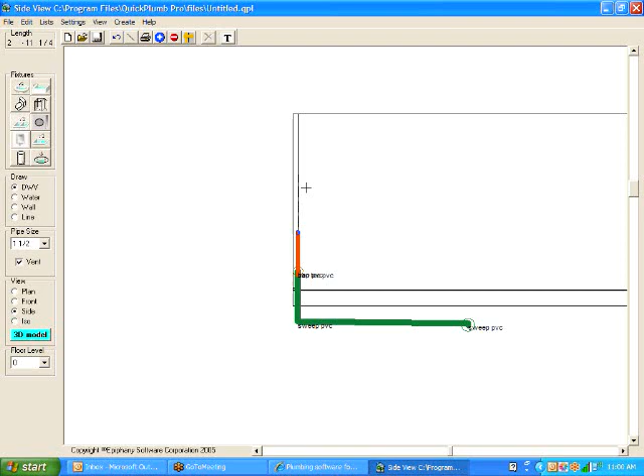It's not going to interfere. Now I can work on these pipes without interference and without confusion.

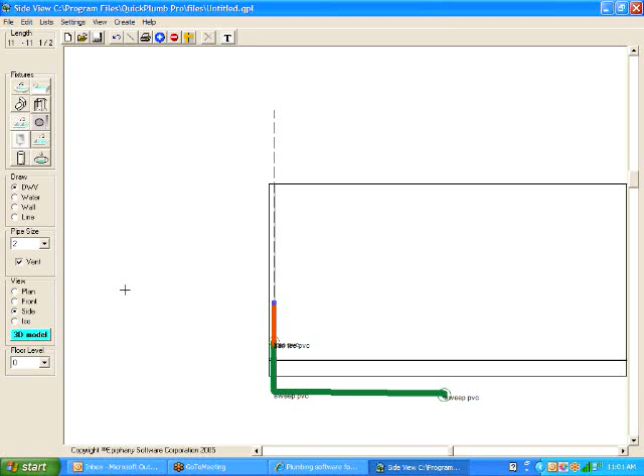So now I might decide to go ahead and bring that washer vent out and through the roof. By doing it this way, you could draw or have it captured where you could draw a fixture at a time if needed. That's right, and you can zoom into that fixture and edit it and add pipes without the rest of the drawing getting in the way.

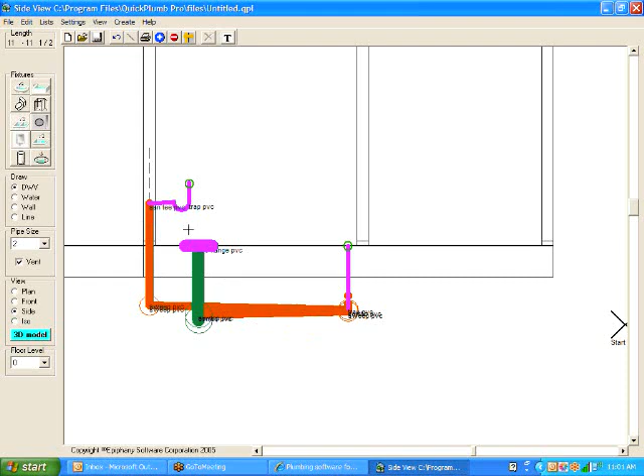Same is true with this bathroom down here. In side view, I've got, that's not so bad, but I could zoom into one part of it or one fixture, go to side view, zoom out a little bit, and now I can work with that by itself without anything else getting in the way.

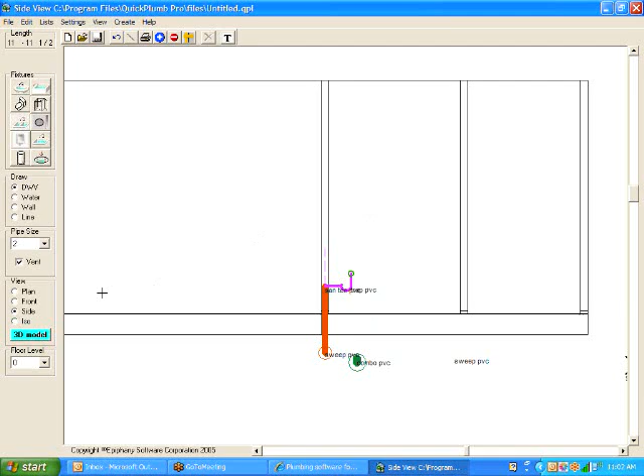Mark, I'm looking at the side view that you have shown right there. Those pieces that are somewhat black and white, are those 2x4s? Oh, yes. This is the 2x4 framework. These are the walls that we drew in the plan view. They're kind of an aqua color, but in the side view, that represents the framing of those walls. You can actually see your plumbing wall as you're plumbing it up inside that wall, or of course, if your pipes are outside the wall, then you can tell right off that your plumbing's not going to work because, of course, you're outside the wall.

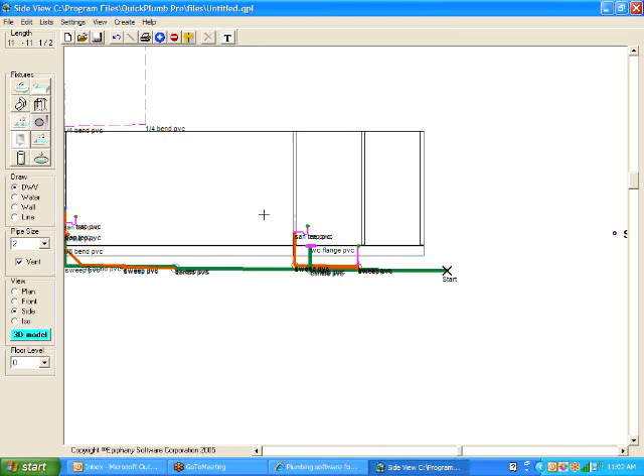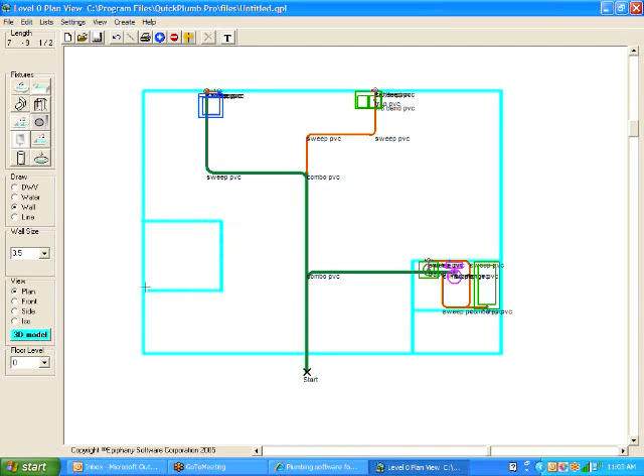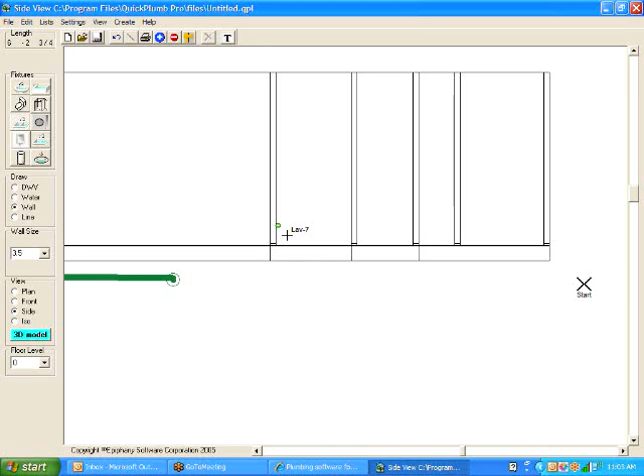That's exactly right. I'll show you a little example of where you might have a problem, and the side view will help you. Well, let me cancel that. I meant to draw a wall. I'm going to draw a wall here, and let's say this is another little bathroom, and I'm going to put a lavatory in there, get it turned the proper angle. I'm going to leave it outside the wall. I might not catch that when I first place it, but when I go into side view and I see this lavatory here, I can see that it's outside the wall now. So now to adjust it, I'll just click on that circle and move it on into the wall.

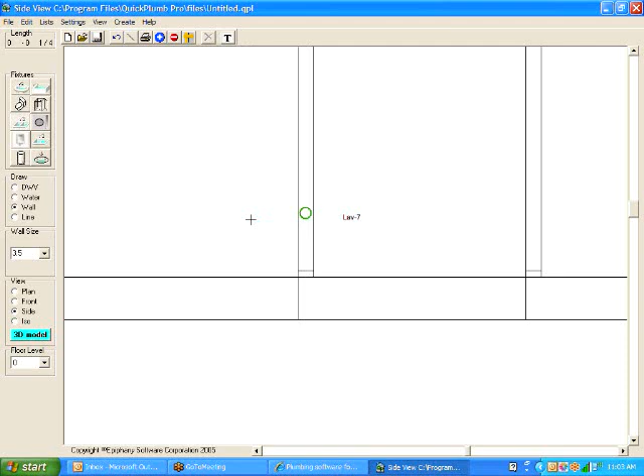Or I'll just click on the circle and I'll drag it with the mouse. Either way. Or I could click the circle and I can move it with the keys, the arrow keys on the keyboard, if I want to be a little more precise. So either way is fine. And once I see it's in the wall properly, now it looks like it's pretty much in the wall. Now I can go ahead and connect that by going back to DWV, select 2-inch pipe size, and I'll click on the drain and drag it over here, and there it is.

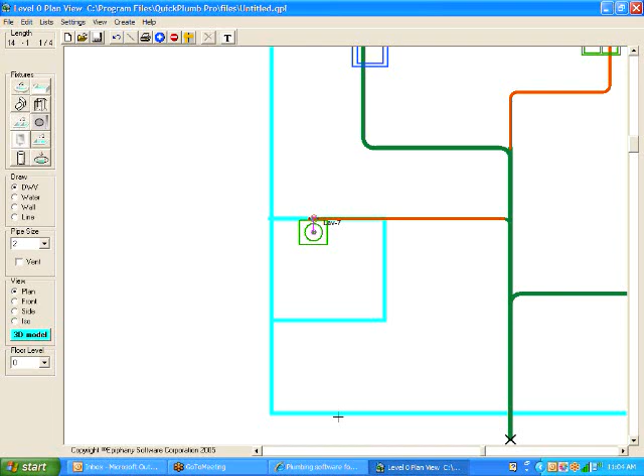Mark, if I can point out, can you go back to side view again? Sure. One thing I don't know if I'm sure, they're just trying to keep up a mile a minute and doing some things on their screen, but over on length, I think that's a real important feature that you may want to mention, because I'm noticing that every time you make a change, it's changing the length and keeping up with that. Oh, the length box, absolutely. Whatever pipe you have highlighted, you can see its length up here in the length box. And if you need the cut length, that's also represented over here in this box.

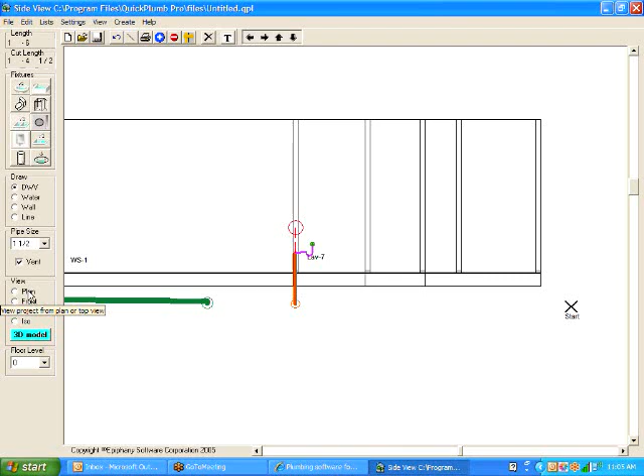So it's actually figuring, on this project we're doing, Schedule 40 PVC? Yes. So on this particular project, not only does it give the total length, but it actually gives the cut length of that actual cut piece on the chop saws at the time it goes for the install. Is that correct? That's correct. In other words, it's compensating for the size of these fittings. Here's a combo that sweeps way out here, so your cut length is almost always going to be smaller than the actual distance from center to center. The length will be from here to here. The cut length compensates for the various fittings.

So that's a nice feature where you don't have to go off to your takeoff books. This literally is a tool in itself, a time saver so you don't have to go out there and figure that math portion. Right, and if you highlight a pipe that's already been drawn, it indicates the length as well. As you can see here, it'll give you the cut length up here of any pipe that's highlighted.

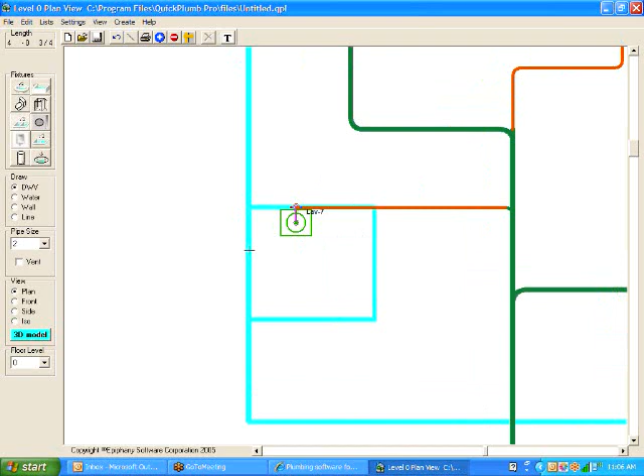So that's a good point. Let's see now, where was I? Okay, well, let's go ahead and, excuse me, we can finish out these vents.

Our code requires at least one 2-inch vent through the roof on every building. Actually, it reads no smaller than half the size of the building drain, or no smaller than 2 inches in any case.

So I can connect these vents together. Let's say I want to connect this lavatory vent over to that washer vent. I can come up into the ceiling space, click on the end of that vent, drag it over to the washer vent, release it, and it's going to make my connections for me.

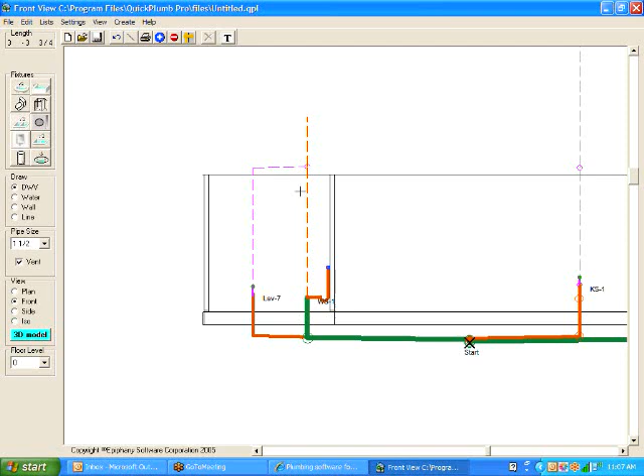We'll go to isometric view, and I'll show you what I mean. This is the pipe that I actually drew, and it brought an additional pipe back over and into the washer vent. So it's drawn in 3 dimensions while you're only working in 2 dimensions.

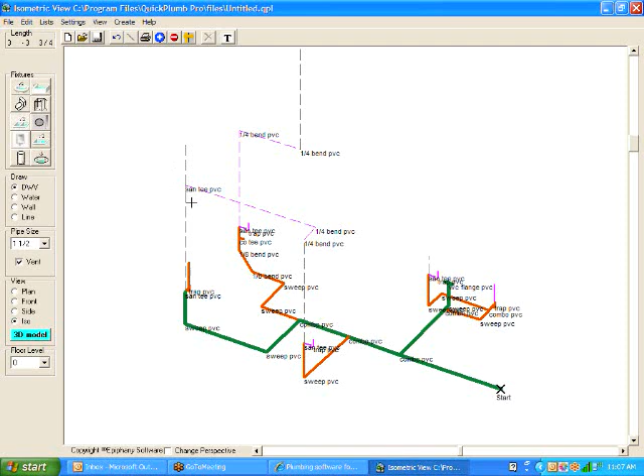Let's view fitting labels. See, it gave me my quarter bends that I needed and my sanitary tee over here. So anyway, you can edit your vents just like you do the rest of it.

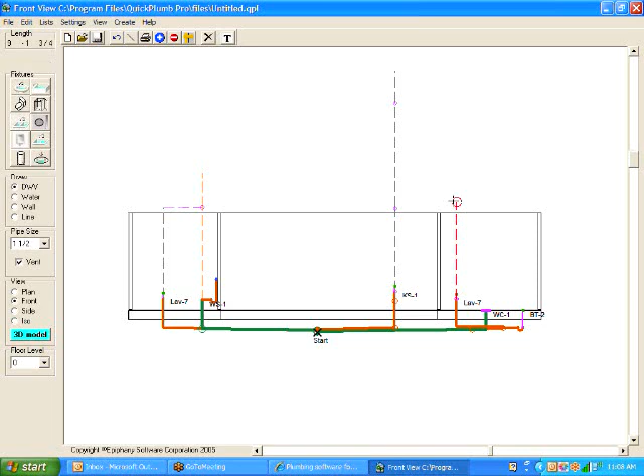Now the only thing left is I've got a vent over here. If I don't want to use an air admittance valve over here, I'll go to front view, and I can bring this vent out individually, or I can tie it in with this other vent stack and use the same vent pipe. So that's a complete plumbing system.

That's in terms of DWV. Now we haven't added any water distribution yet, but I want to demonstrate what you can derive from this drawing. We've already talked about the pipe cut list, which I'll do now.

I'll click on Create Pipe Cut List DWV. Let me see if they can follow along on this one, because this is a really neat feature. So for whatever you've drawn so far, guys, you're going to get maybe a few lines, something that's on the screen in front of you.

At this point, go ahead and follow along with this Create feature. That way you can go ahead and pull together what he's fixing to show you as far as what this tab can do. Whatever you created so far, let's see what this tab can do.

Okay, I'll click Create, and we want to create a pipe cut list, DWV. And then it's asking me what phase of construction, because if we're doing an underground slab, we're not going to be cutting pipe for the rough-in phase, we call it. We're just wanting the slab pipes, which is all the piping below this floor level.

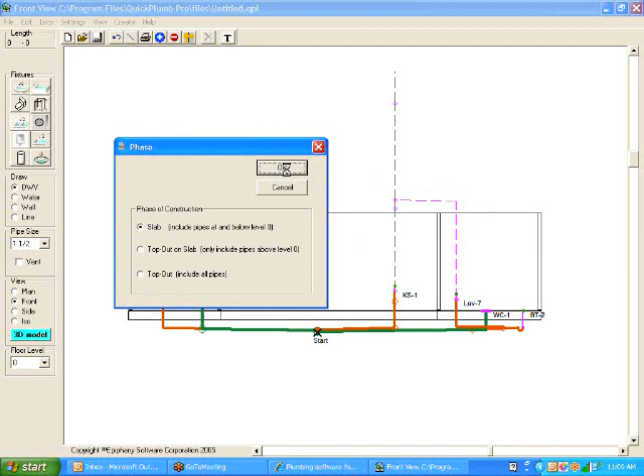It's going to ignore all these vents. We click OK, and there is listed every pipe in that drawing below the slab, or at least that starts below the slab. It may extend up 10 feet in the air, but if it starts below the slab, it will be in this list.

Okay, we see pipe numbers in this column, and the pipe size in this column, and the length. This is what you're going to need here, the length. And the distance to floor is just a reference — the distance of the end of that pipe to the floor level. We don't use that very often, but it's there if you need it.

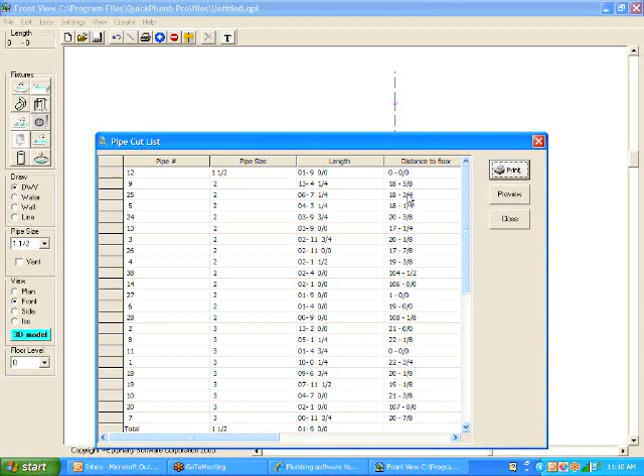I'd like to try to tie this together in terms of this cut list. The pipe number here, you're probably wondering what that is. What that pipe number is — every pipe in this whole drawing has a number.

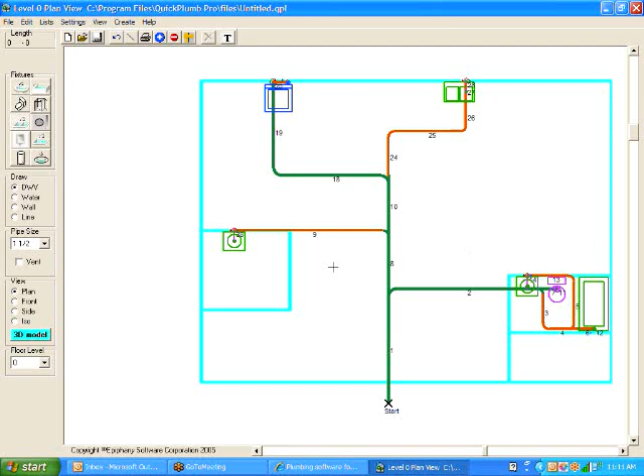And the way you derive that, or the way you get that, is you click View, Pipe Numbers, and here you can see every pipe number below the slab. Now...

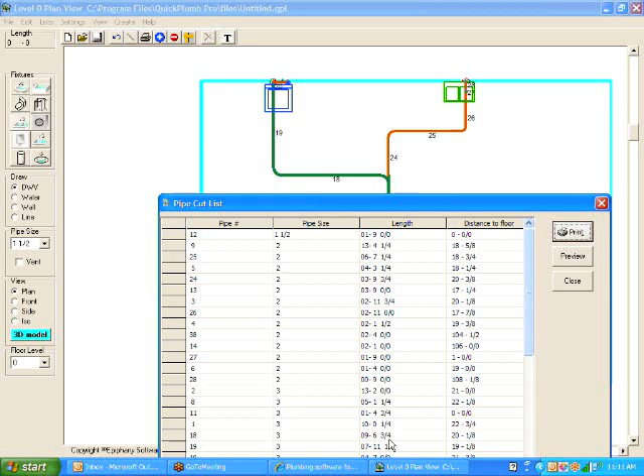These numbers correspond to the numbers in the pipe cut list. Okay, here's pipe number 18, and that's pipe number 18 down here. That pipe is 9 foot 6 3/4 inches. We can just verify that by highlighting it, and you look here, that cut length is 9 foot 6 3/4 inches.

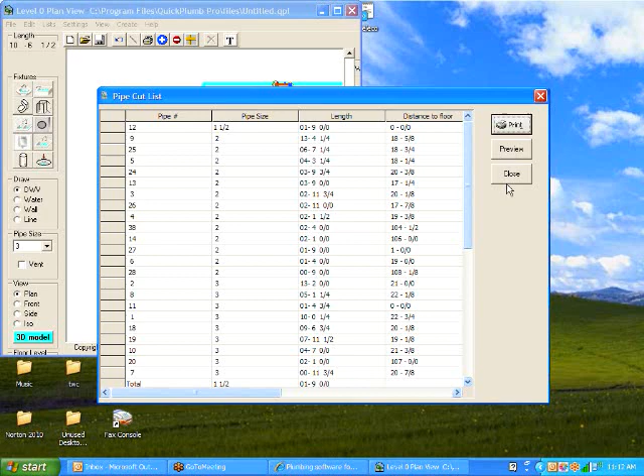So say, based off of the blueprint, all your dimensions, you're doing your walls to what you're seeing on the blueprint, to what you're sketching now. With this cut list, you can turn this basically over, ideally following along with the blueprint, to say your apprentice or technicians, and they know exactly where that piece goes — the exact location of where it would be placed, say we're doing a rough-in or coming out of a wall or whatever it may be. It's giving it that much detail.

Absolutely. This is a means of cross-checking your slab, your underground slab work. This is very helpful in doing slabs.

We use it a lot here because we know where each fixture is. And so if for any reason when we assemble these pipes, if we don't end up at that fixture, that tells us that there's an error somewhere, and it may be that they formed the slab incorrectly. I've found many times, I've checked on the concrete guys, found out the concrete guys didn't read the plans right, and the only reason we found that is because our pipes didn't end up where they should.

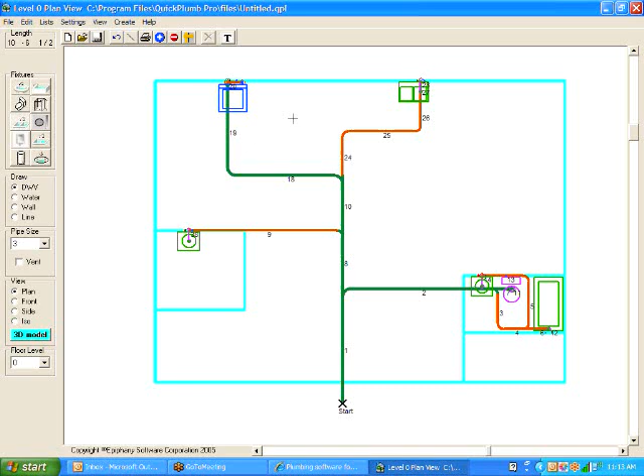And that's a good segue to the next little item I want to mention.